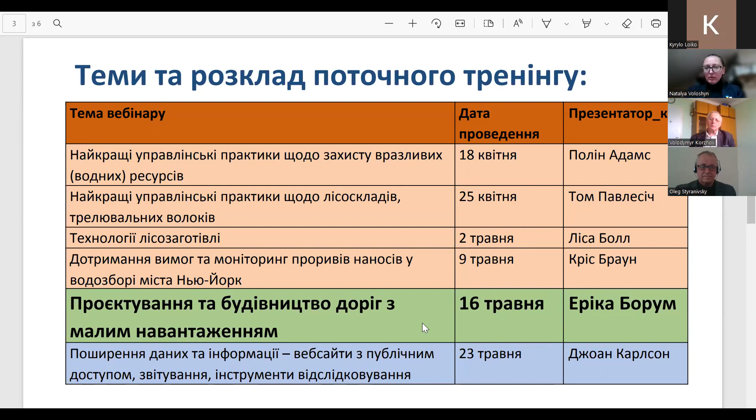The next webinar, as I have already referenced, unfortunately will not take place, or rather it will be postponed, so it will be incorporated into the next training. I'm very sorry for being a little bit hectic. So you will be able to be exposed to Joan's presentation, but a little bit later.

Here you can see the ground rules of our webinars. They're quite flexible, but still important. So the first part of the webinar is the presentation on the topic, and you are kindly encouraged to ask any questions or articulate any comments in the course of the presentation. Then we will have a lengthy Q&A block. But once again, if you come up with questions in the course of the presentation, and then there are some follow-up questions, we will do it in the midst of the presentation as well.

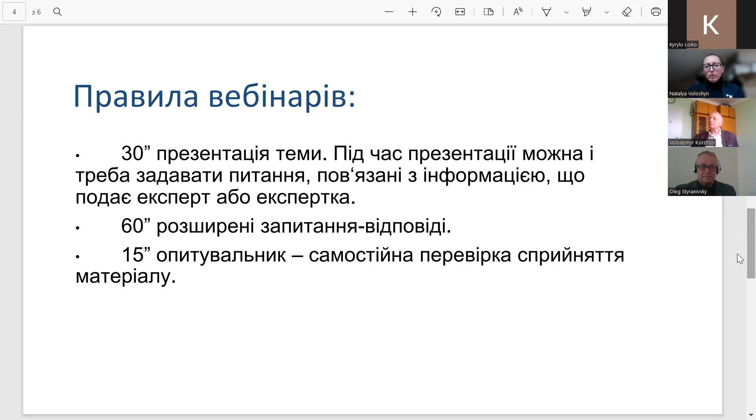And then at the very end of the webinar, if time permits, we will walk you through the quiz. We designed this quiz as part of this training course because we believe that it's a great self-assessment tool for all the participants.

Some other ground rules: we're going to have simultaneous interpretation, and we have our interpreter working with us, Ola. Please pick the relevant channel depending on the language that you want to hear. To this end, find a globe symbol at the bottom of the Zoom screen. It should say interpretation there. Click on it and pick the relevant channel. So if you want to listen to everything in Ukrainian, pick the Ukrainian channel. If you want to listen to everything in English, pick the English channel, or you can have the interpretation off if you want to listen to everything in the original language.

If possible, and if connectivity allows, please have your camera on, because that will definitely facilitate our communication during the webinar. And I also have a big request to all of you to have your cameras on at least for a couple of minutes for this intro, because we would like to make a screenshot. This is our final webinar within this series, so we want to capture everything for the future. If you want to say something, you unmute yourself. Whenever you're not speaking, please have your mics off because we don't want to have any background noise.

If you want to ask a question, you can raise your hand virtually. There are multiple reactions on Zoom, so you can utilize them. You can raise your hand, you can clap your hands, you can have some fireworks or do whatever with these reactions. And settle down snugly. You can fetch your favorite drink. We want to make sure that you are cozy and comfortable because we have 2 hours of work ahead of us. So we want to make sure that you feel comfortable.

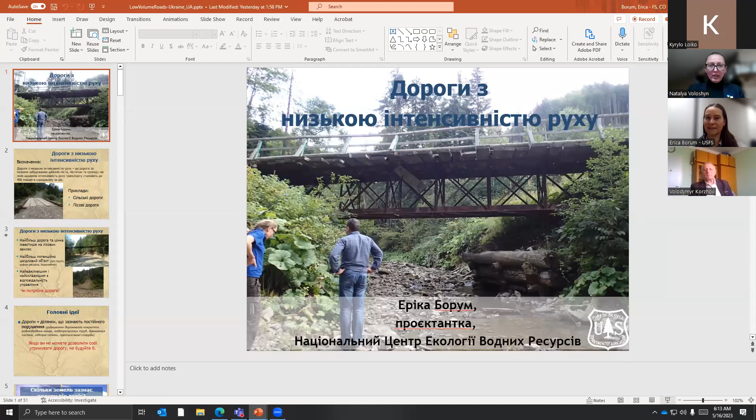Hello, everyone. Do you see this? Not yet. Okay. I can see your presentation. Okay. I will guess. Can you see it?

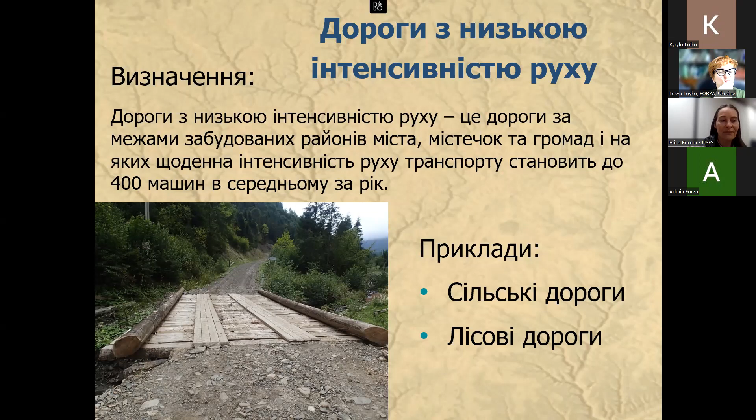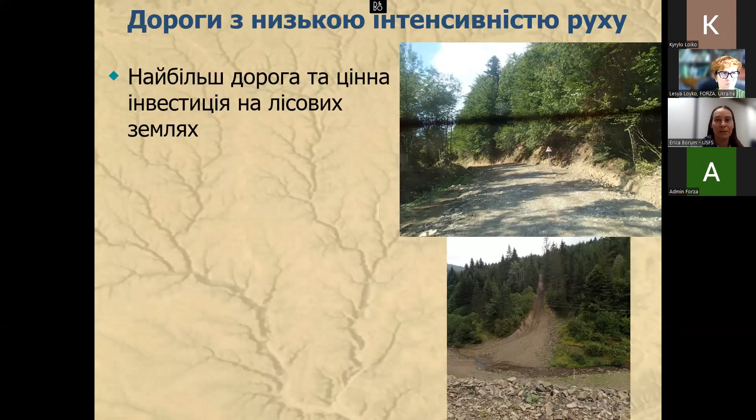So from my perspective as a road manager for the Forest Service, our road system is several things to me. It's our most expensive and valuable investment on our forest lands. If you have been involved with road construction, you know that they are expensive to build. They are also our most potentially damaging feature on the landscape. So ensuring that best management practices are followed is critical to the longevity of our road and maintenance. So that leads us into roads being our most important and difficult stewardship responsibility. So for any new road construction or road reconstruction, it's important to answer the question, first and foremost, is the road needed?

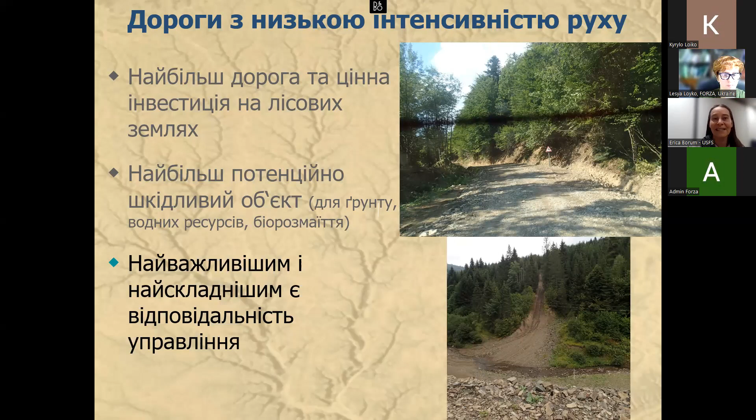So we'll get to our first key idea. We know that roads are chronically disturbed areas. They're compacted earth, void of vegetation. And something I remember hearing a long time ago is roads, they last a very long time on our landscape. We can see wagon trails from hundreds of years ago. They are called scars on the landscape.

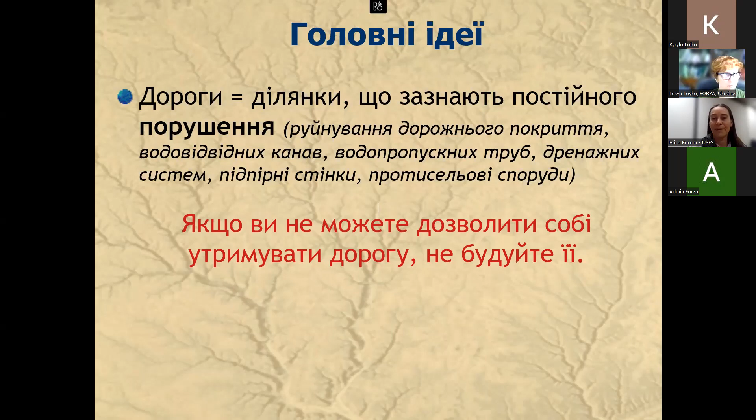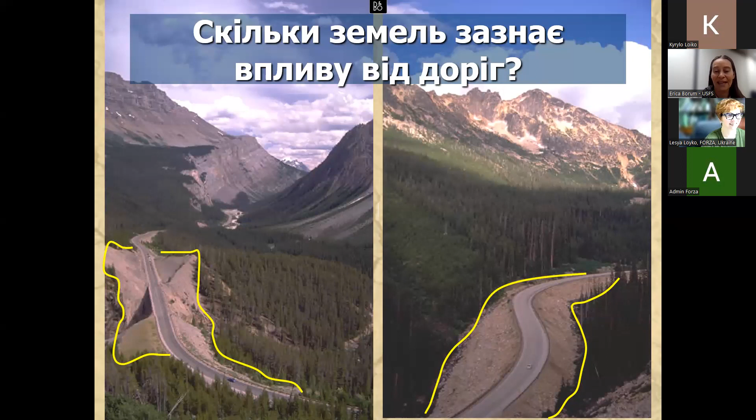Another example of chronically disturbed area includes the surface runoff from roads when it rains. So when you look at the adjacent area of this road, surface runoff is virtually non-existent on the intact vegetated forest soils. It infiltrates. But on compacted roads, it's very obvious. And as a forest roads manager, once we concentrate that flowing water, we own it, meaning it's our responsibility to deal with the flowing water and the sediment that it carries. So roads can be very erosive.

The preferred methodology for roads is to use vegetated soil as nature's treatment system. So looking at this diagram, left is a compacted road where we can't get into the soil, that causes the water to pond. The idea is to move that water off of the road to a vegetated area where it can infiltrate. So managing water runoff, ideally by infiltration, becomes our task.

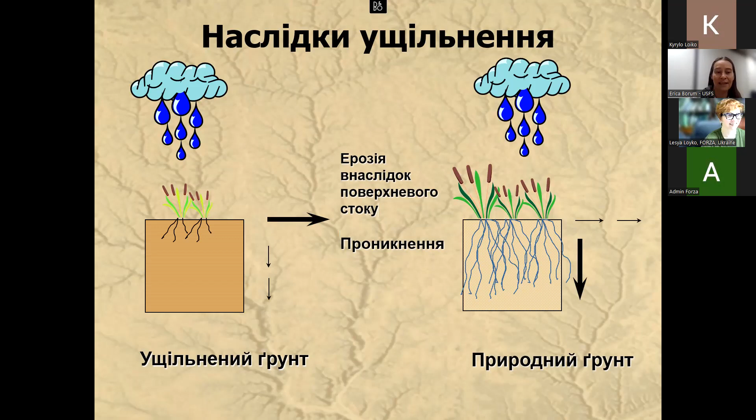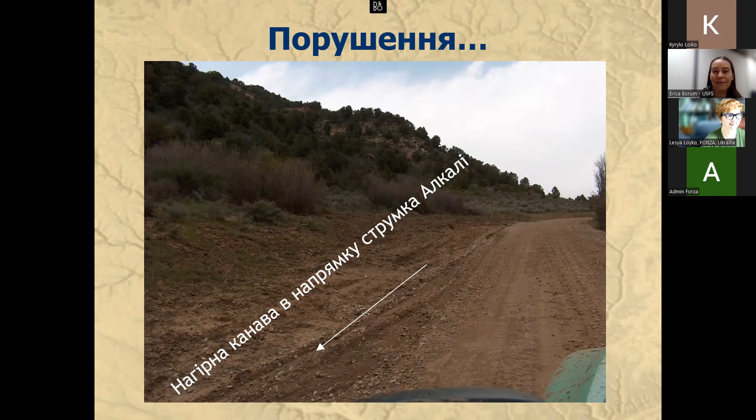So we'll look at a few bad examples of roads. And looking at this picture, we see that the road surface is not the only disturbed area. We have a recently graded or disturbed ditch line that adds to the bare soil. So this ditch is moving directly toward Alkali Creek, connecting our road straight into the stream channel without any infiltration, resulting in a loss of water quality for this system.

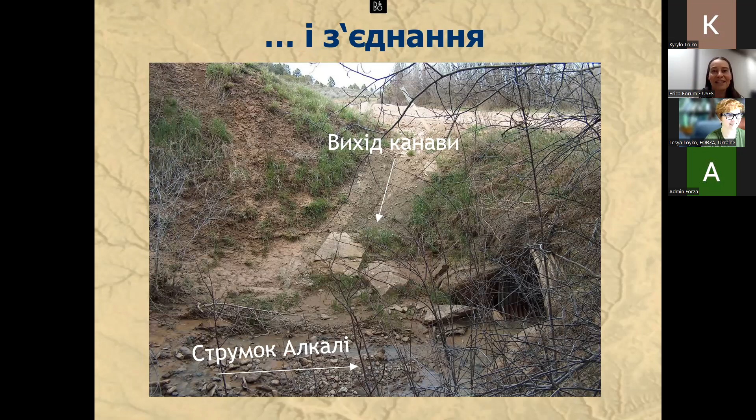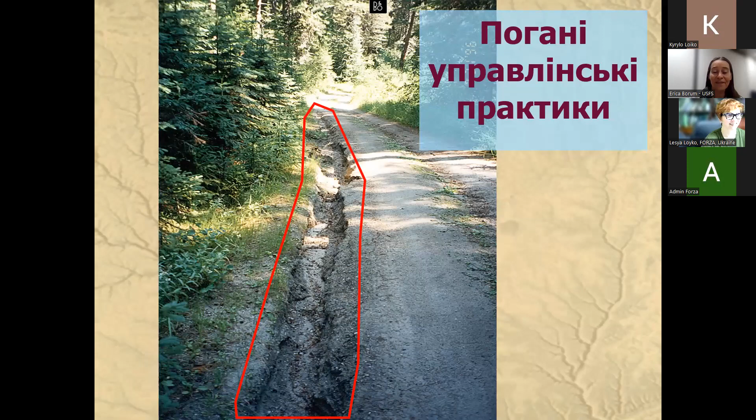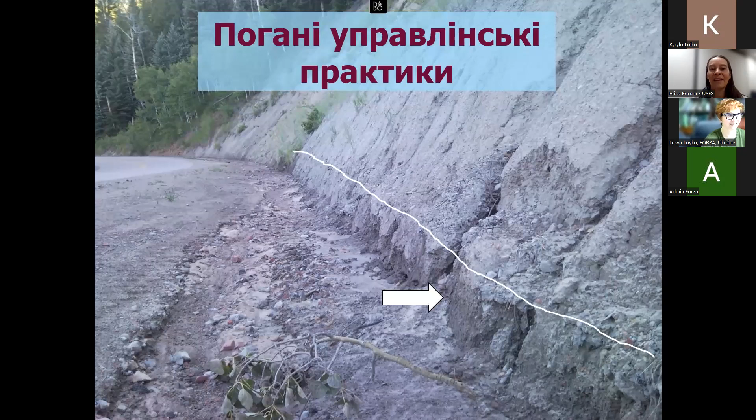And thinking about our roads and the disturbed area, some areas are really disturbed. And we have this cut bank where no vegetation has grown and it has resulted in a landslide. So these unstable slopes are a great source of erosion. So thinking about the angle of repose, or how steep the soils can remain stable on a cut bank, is important.

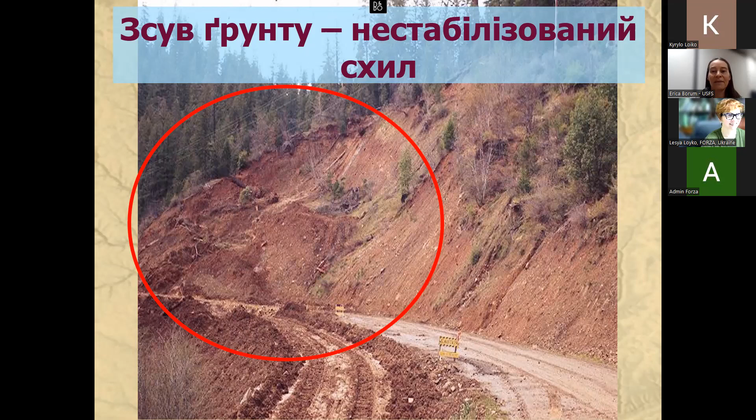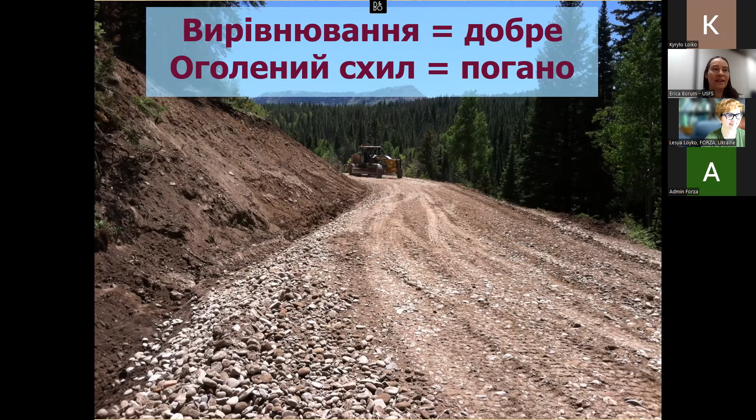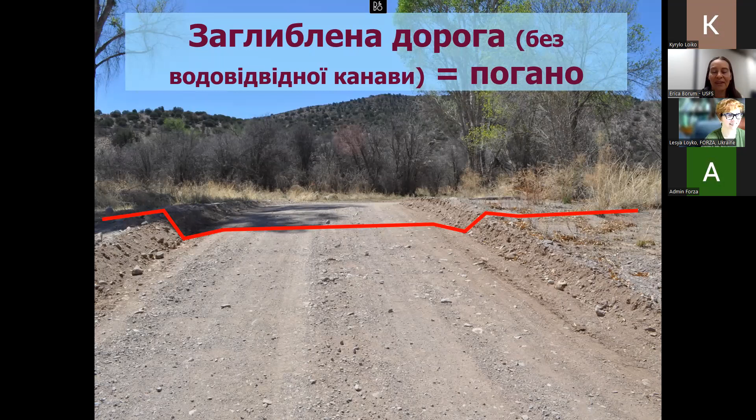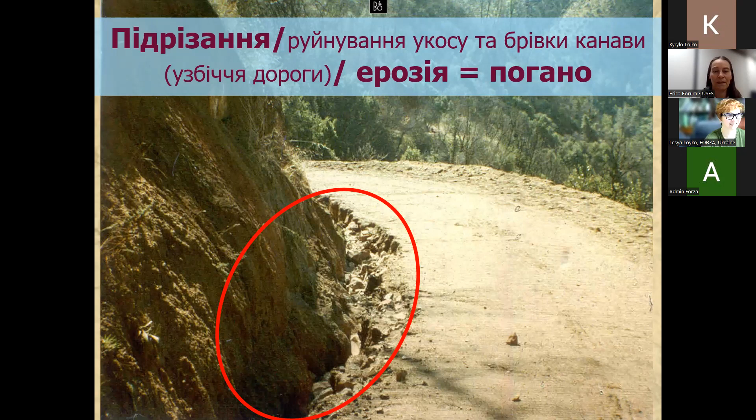And another bad example of too much water undercutting the adjacent cut slope. So one thing to think about if you are responsible for road maintenance is if a ditch is vegetated and it is functioning, there is no need to disturb it. And because road surfaces concentrate water, our goal is to disconnect our roads from our streams, including our skid trails from our streams. And here's a picture where they're directly connected.

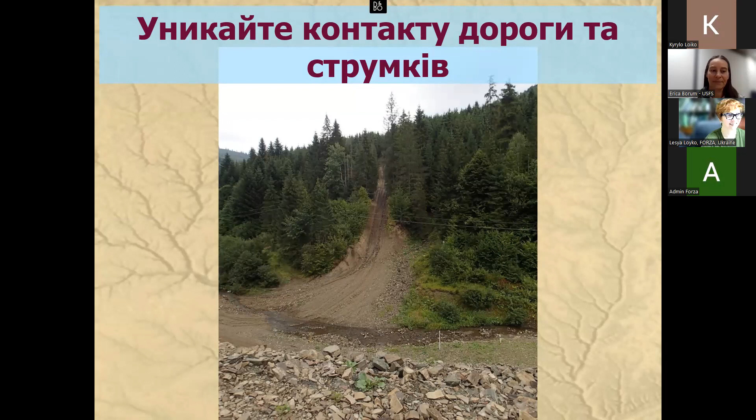So just as our streams do not benefit from road-related sediment, sedimentation from our roads is one of our greatest water quality issues for nearby streams. We also know that our roads do not benefit from water. But why does this matter?

This matters because we don't live in a bubble and we are dependent on biodiversity and the animals in our ecosystem. And most animals depend on water or streams or rivers for survival. So for example, I live in the state of Colorado in the USA, and the area of land that makes up wetlands, streams, or rivers is just 3% of the total land area in Colorado. However, it is estimated that 90 to 95% of the animals in the state rely on these rivers and wetlands for survival. And so these sensitive areas or wet areas can be very damaged by our roads.

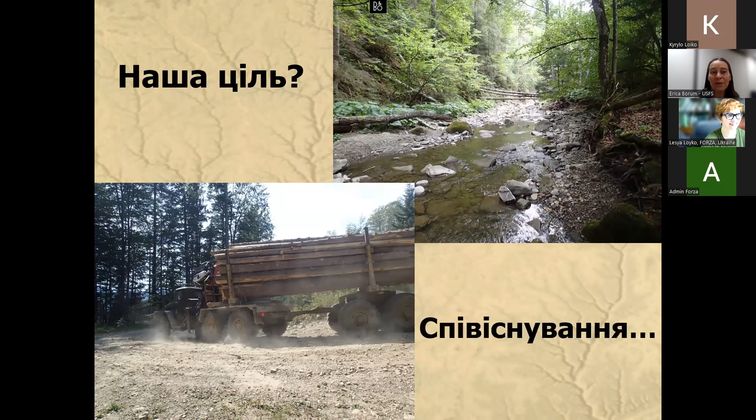So one could argue that all of our waters are sensitive waters for those who depend on them. So if a road is really needed, going back to our first point, our goal is to coexist, so live together. So getting to our next key idea, we've known for a long time that our water and our roads are not friends. Climate change is making this fact more and more evident, and climate change is also showing us that Mother Nature is the true boss. So John James Audubon of the Audubon Society has a saying: when the bird and the book disagree, always believe the bird.

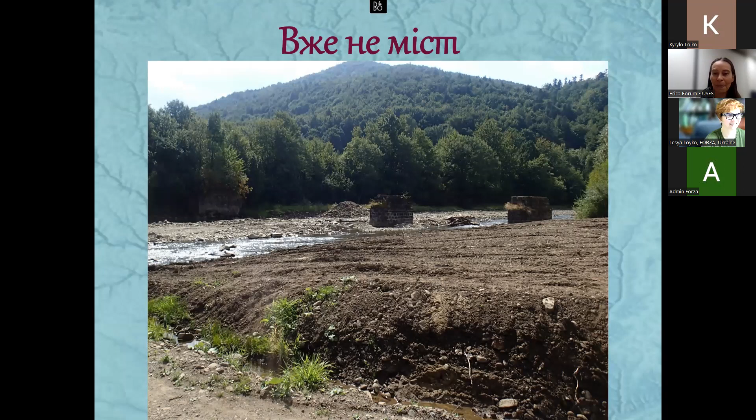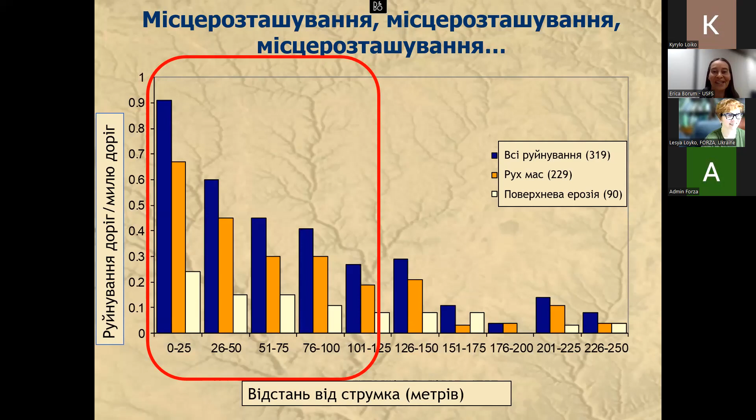When it comes to road failure and erosion, the Forest Service has found that we can prioritize our efforts by prioritizing where most of our road failures occur. And the likelihood of a road failure increases with proximity to a stream or a river. So this graph shows that if you are within 125 meters of a stream or a river, this is where your roads are most prone to failure. So again, Mother Nature will always win.

We historically built roads where roads were easy to build. So up a valley bottom, for example, because the valley bottom is gradual. But we're finding that this method is very expensive in the long term. So the engineering version of John James Audubon's quote, I have adapted to something like: when the engineer and the river disagree, always believe the river. So let the river decide the engineering and the road location. In other words, stay out of the way.

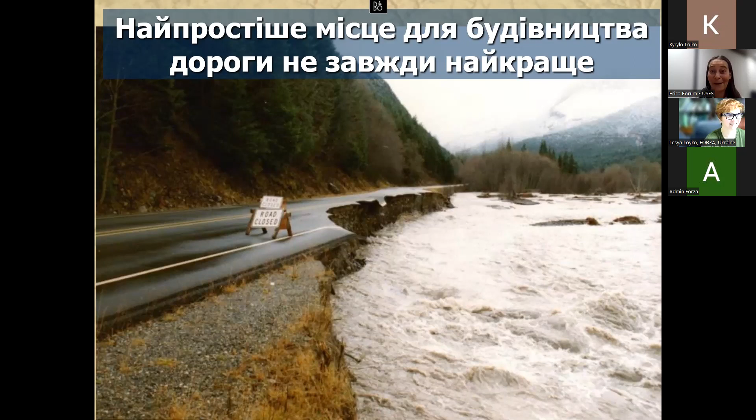So we'll get into some more failure examples. This is the inevitable consequence when a big storm, or a big storm with a high debris load, arrives at a crossing that is too small. In this instance, the road is washed away. And at this particular site, there were actually vehicles on the far side of the failure that were trapped there for several days.

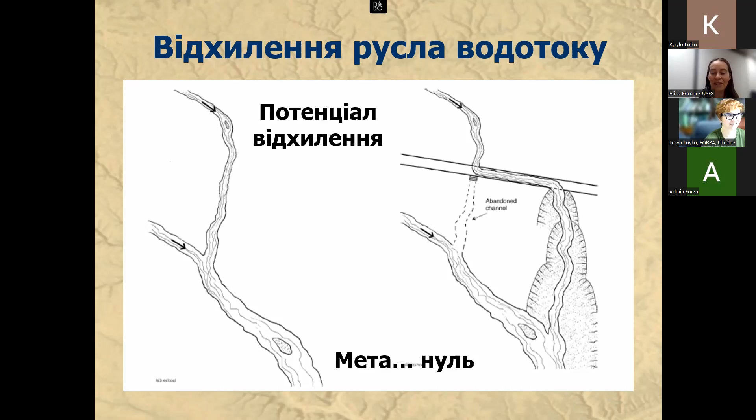So where a road and a stream cross, which becomes inevitable, we want to minimize the stream diversion potential. Stream diversion is especially damaging. This diversion potential is the probability of a stream moving out of the channel and down the road in the event of a culvert plugging or high flood. So our goal is zero diversion potential.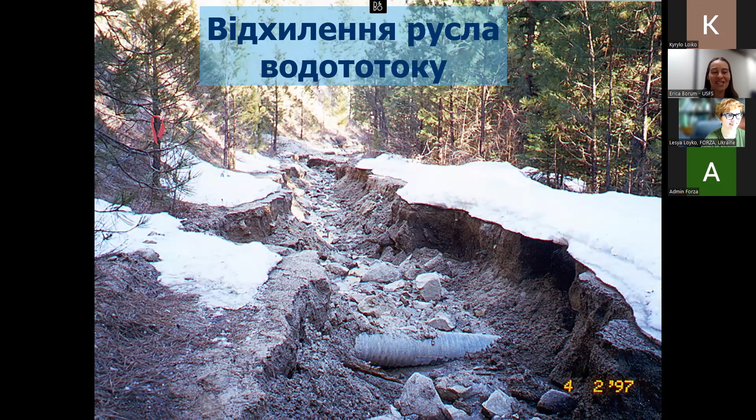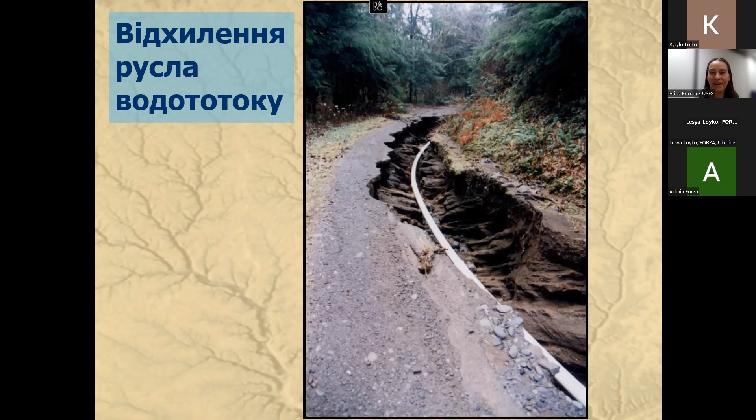Conversely, this is what can happen when a stream diverts down a road due to a plugged culvert. In this instance, a culvert plugged at a crossing, and the water diverted down an inboard ditch on a steep road grade. So all of this erosion area was once the road surface. And you can see at the bottom of this photo a drainage culvert that is likely no longer functioning. This is the same situation as previously, where a stream has diverted and cut down to a utility. So a good reminder that roads and water are not friends.

Eventually, water will find its way off of the road after it's done some damage. And this is where really huge erosion can occur. So where the flowing water finds an exit point, it creates a new channel down a hill slope, sometimes resulting in a landslide, but always resulting in a lot of erosion.

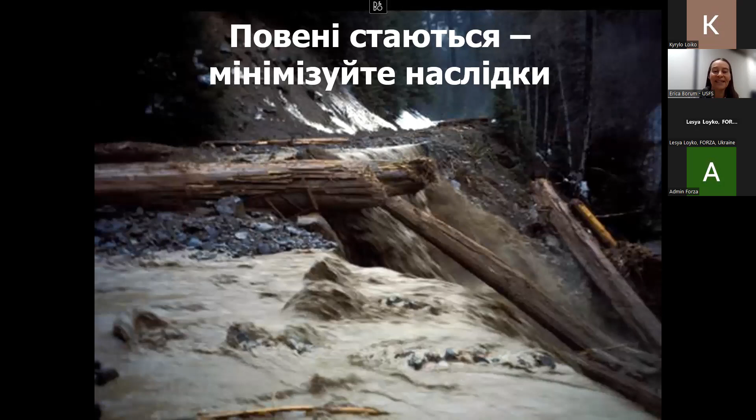So all of our road stream crossings can fail. Some are more likely than others. One way to minimize that risk is to design with failure in mind. So we looked at a lot of bad examples, and it is inevitable that roads and streams will eventually cross. So we want to stay out of the way of our streams, but we'll get into looking at what that looks like at a road stream crossing.

So what do we do? Getting us to our third key idea, roads and streams will eventually cross. So what do we do? Well, the Forest Service has its own methodology that it created to address this crossing. And I'll go into more detail on that. But at the very, very least, accommodate the stream width through the crossing. The idea is to maintain the stream energy.

So we know we've seen examples of streams and rivers moving more than water. So where a road and a stream cross, we want to design for passage, but passage of what? We want to design for passage of water at a flood stage, debris, the animals in that system, both the aquatic organisms and the land animals or terrestrial animals, and then sediment is always moving through these systems. So we want to allow for passage of the sediment. So the whole premise behind this is to maintain the stream's energy, maintain the system's energy.

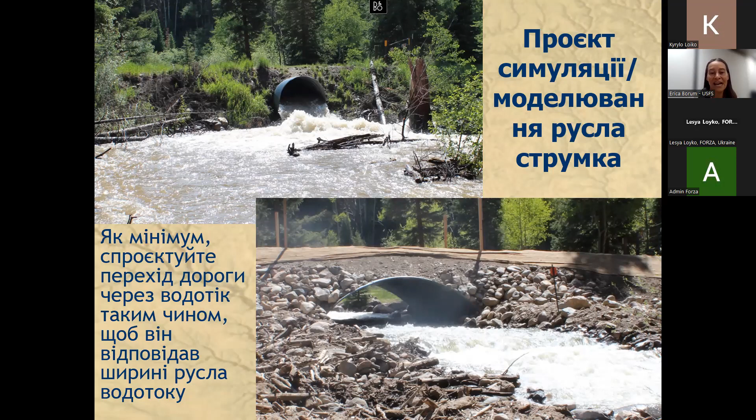And comparing these two pictures, the one on top was an old culvert that was hydraulically designed. So it was designed to pass some amount of flow most years. And then it was replaced by this bottom structure, which spans the width of the stream and allows the natural processes through the crossing.

So the stream simulation design, the Forest Service methodology, maintains habitat connectivity. If you compare the picture on the top with the picture on the bottom, this is at the same site. The picture on the top is before these two culverts were replaced. And you can see how disconnected it is. There is probably a meter drop from the end of that culvert down to the stream. So any animals in the system have become disconnected.

What we are finding is these structures are flood resilient. We have several instances where very large storms have come through at crossings where we have replaced structures with this stream simulation design. And they have been 500-year storms, 1,000-year storms, and they are not failing. They stay intact, they function, and also they are long lasting. We are seeing these structures with a design life of 75 years or more. So they have a very long lifespan.

And when you compare these two pictures, you can notice that the bottom picture has a natural stream bed. So that allows for sediment to move through the system without causing the structure to erode at the bottom, or the abrasion from the sediment moving through the system. As on the upper picture, you can see that culvert has even started to unravel from all the sediment moving through.

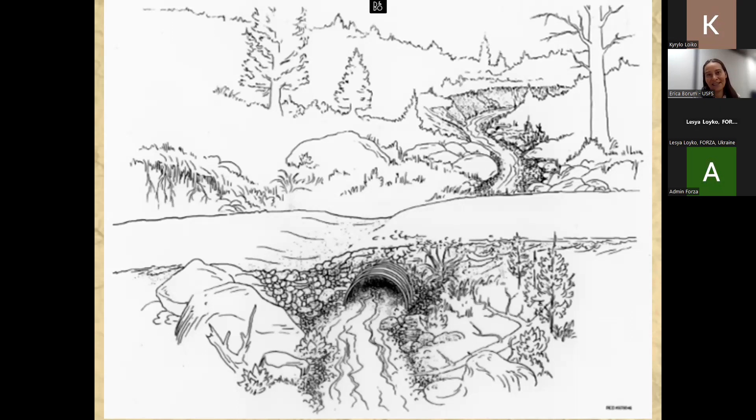So this is just a simple cartoon illustrating designing for failure at a road stream crossing to prevent the diversion potential and to minimize risk. So we talked about how all road stream crossings can fail. So minimizing the risk is another important aspect.

So during some flooding in 1995 and 1996, the Forest Service identified 258 culvert failures that failed due to debris and sediment essentially blocking the culvert. So of those 258 culverts that failed, 91% of those failures were from plugging.

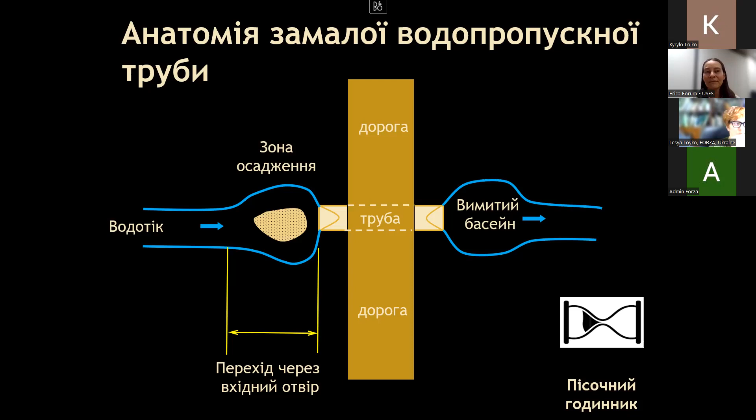So this is just a depiction of how a stream will tell you if a culvert is undersized, particularly relative to width. And we can notice that in this example, the system is shaped like an hourglass. Starting with the inlet, we have this inlet transition zone where water comes down, and when the culvert is undersized, the road is essentially acting as a dam where the water slows down, and then you get a deposition zone at the inlet. And then you have water ponding behind the road, and that causes a bunch of pressure, forcing the water through a little pipe out through the outlet into this outlet transition zone.

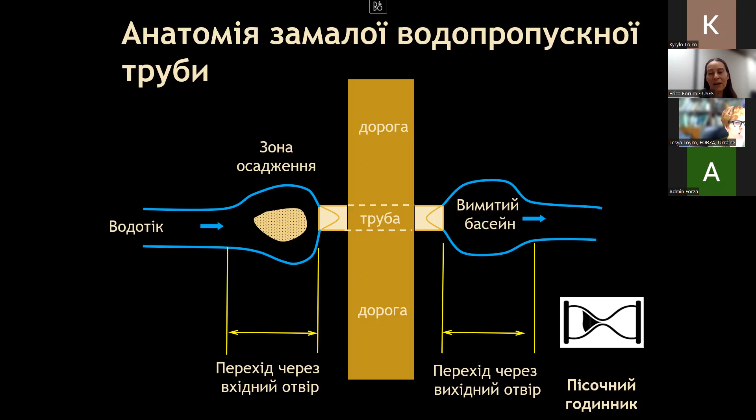So the culvert starts to act like a fire hose, where you get a lot of scour at the outlet, and that starts to disconnect the upstream from the downstream. So looking at the anatomy of an undersized culvert, this is very typical, where you get over widening at the inlet due to water slowing and eddies forming, and then over widening at the outlet due to scour.

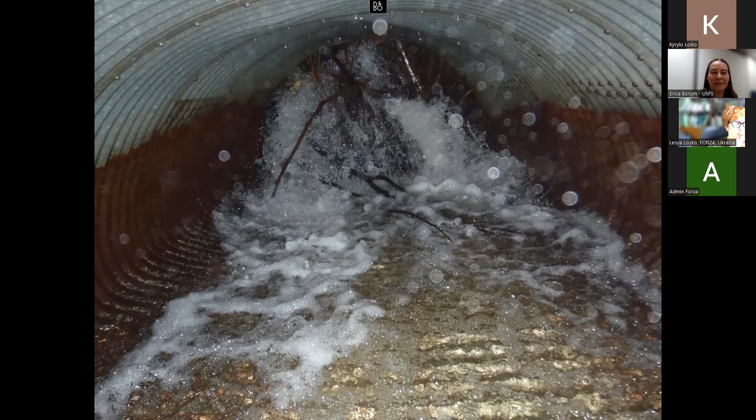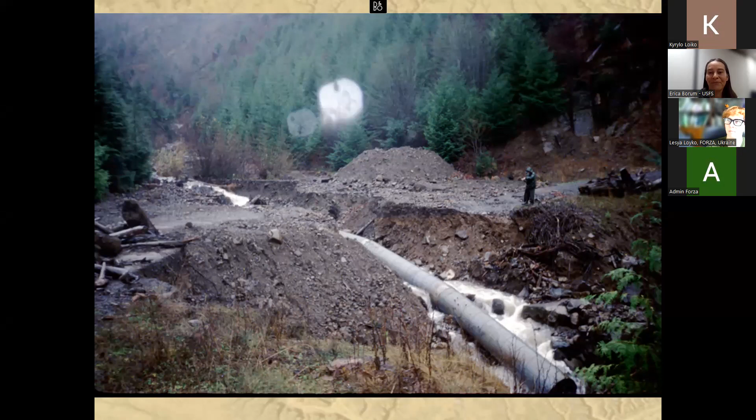So here is a real life photo, not a cartoon drawing, of what a failure might look like at a road stream crossing. So this may be hard to believe, but this is the preferred failure scenario where the diversion potential was avoided. So only this crossing needed to be replaced. But I would highlight this photo, going back to our third key idea, look at the size of this culvert compared to how wide of an area this eroded out. So I would say the main cause of this failure is because that culvert was so very undersized. So maintaining or accommodating the stream width is, at the very least, the importance of these road stream crossings.

So the next key idea. So we started with the question, is the road needed? And then the next question, is there money and a plan to maintain the road if you build it? So if the answer to both of these questions is yes, then using best management practices for new construction is ideal. So we want to integrate resiliency and engineering informed by Mother Nature. We talked about Mother Nature as boss. This will make a road less prone to failure, and it ends up being cheaper and easier to maintain.

So I believe if you joined Pauline Adams' presentation, she discussed best management practices for sensitive resources. So low volume roads have their own chapter within this best management practice technical guide, and it's the road management activities chapter that's of interest. And to highlight some of those, for new road construction best management practices, the first thing we want to think about is locating a road to fit the terrain, following these natural contours, and limit the need for excavation or the disturbed area, the cut and fill.

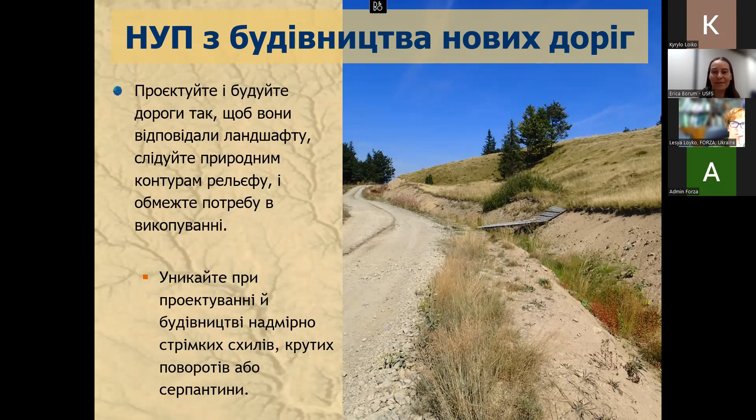So we want to avoid extended steep grades, sharp curves, and switchbacks, ideally. That can be a little difficult in forest terrain where the forested area tends to be steep. So we also want to locate our roads on stable geology with well-drained soils and rock formations. So avoiding, as we already mentioned, the wetlands, the inner gorges, the overly steep slopes, unstable landforms to the extent possible. So although building a road up a valley bottom that has a river in it is the easiest location, it's going to be worth the effort and the money to build a road up out of the valley, up higher, where it will not be impacted by flood events.

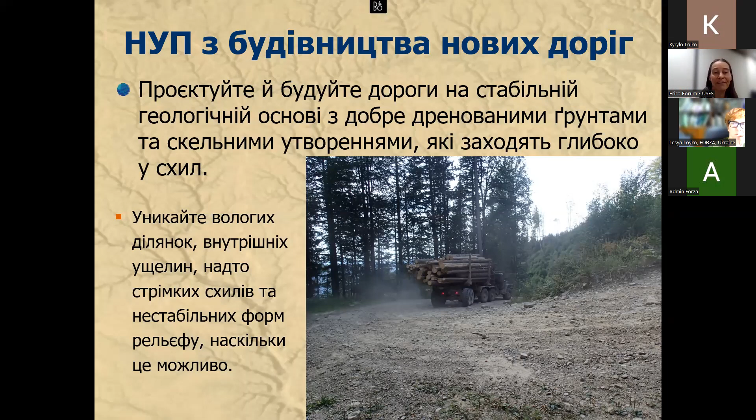And on that topic, move our roads or locate our new roads as far away from water as possible. Water and roads are not friends. And we also want to minimize our number of crossings and disconnect our roads from our waters. So avoiding sensitive areas, riparian areas, wetlands, meadows, bogs, fens to the extent possible, and provide suitable distance between the roads and the water to maintain our desired conditions, our goals, and our objectives for our structures to function and for the stream's natural processes.

And I just wanted to point out this picture. We have Natalia in this photo, and the red circle is showing a former bridge abutment. And you can see that that abutment is very close to the water. I suspected that the stream caused damage to the original bridge, and thus a new bridge was put on top, which is a much better location.

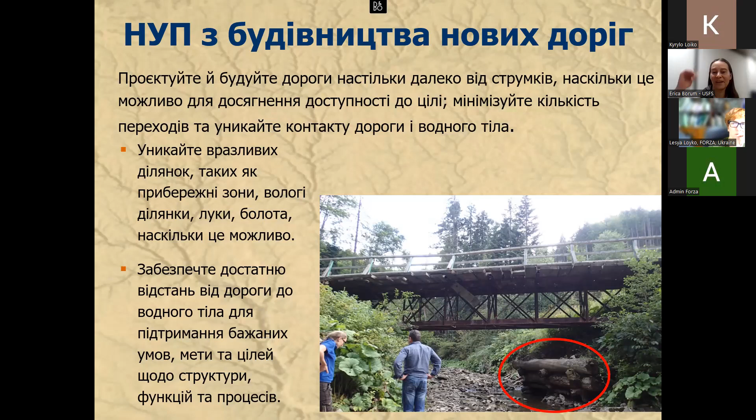So now that I've touched on key ideas of low volume roads, I was primarily addressing the risk and failures. I want to point out several references that may be helpful to you in the future. And these two documents are on FORZA's website. And I believe you will get a copy of the presentations, and each of these are hot linked. So you can actually just click on the picture of the document and it will take you to that document. So the basics of transportation and construction of roads and best practices in the construction.

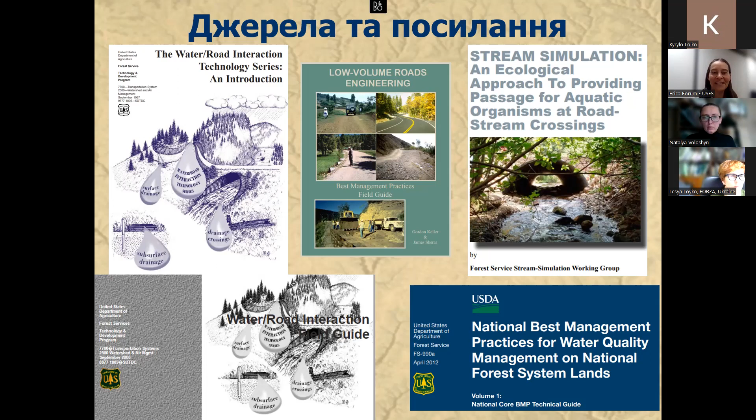But what we also have, the Forest Service has manuals and handbooks on transportation policy, and they're very comprehensive. They cover planning, pre-construction, structures, construction, maintenance, and operation. And again, these are all hot links to these handbooks. So for more information on those, you have access to that. And that goes into Forest Service policy of how we manage our road system.

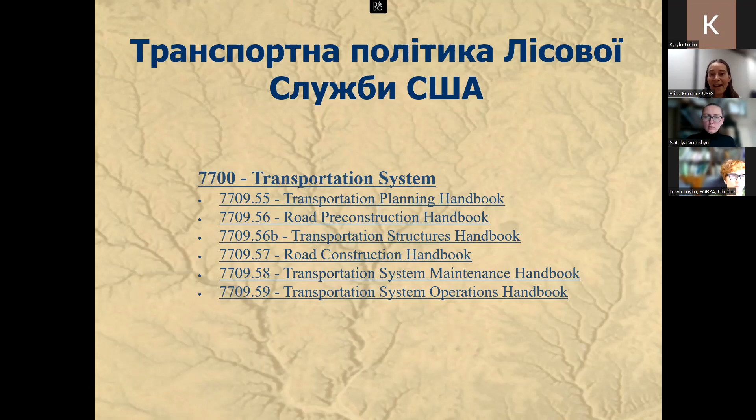And with that, I want to break out into a discussion. Any questions that we may have? I want to know about your roads in Ukraine. How is it going? All sorts of things I want to learn from you. So thank you so much for your time and attention for joining us today.

Thank you, Erica. Thank you very much for this insightful and stimulating presentation. At the very beginning, I wanted to point out that it's 7 o'clock in the morning for Erica, but I forgot to mention it. Basically, she started her presentation at 6 o'clock in the morning. So we are profusely grateful to you, Erica, for your willingness to be up that early and spend this time together with us.

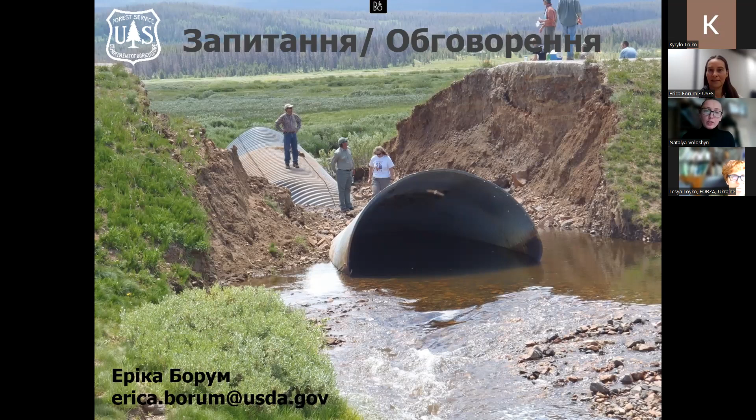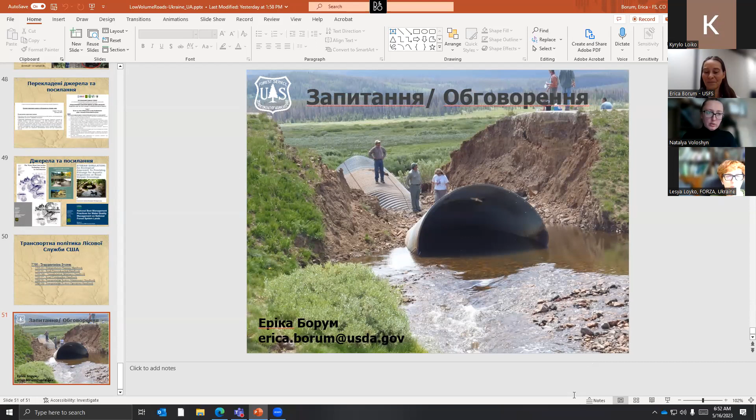We already have some questions in the chat. The first one is from Boris Boychuk. One of the questions is for the Ukrainian colleagues, so think who can answer it, but there are also some questions for Erica. What is the cost of culverts in the US, like the last examples that you demonstrated within your presentation? I guess these good examples. Boris, are you interested in these ones, the good ones? Correct me if I misunderstood your question. So what is the cost of these structures? And there's another question, more about regulations, but let's start with the first one.

Okay. Yes, thank you for that question. This is always the question. How much do these cost? They are more expensive than the hydraulic design culverts in the short term, but we are learning that in the long term, because they're not prone to failure, they become much cheaper. So this structure on the bottom, if I remember correctly, we replaced in 2014. So the numbers are 2014 dollar amounts.

And I believe this structure was 150,000 US dollars. And one thing I wanted to point out is this structure is actually sitting on top of concrete footings. So there are footings that are buried beneath the stream. And then this aluminum structural plate is the lid with the road going over it. It depends on the size of the system. Of course, the bigger the stream, the more expensive. So it's essentially acting as a bridge, but it's a different methodology than a bridge. Thank you for that question.

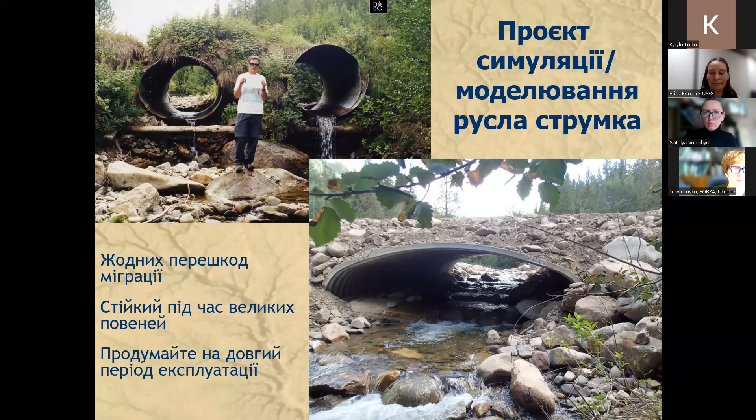Дякую, Еріко, за відповідь. Я повернусь. Thank you, Erica. But I want to revert to the question for the Ukrainian colleagues. Maybe someone has an answer. So the question from Boris was whether someone in Ukraine is manufacturing such structures across streams. So maybe no one is ready to answer this question right now.

Volodymyr, I can see a big surprise on your face. It looks like you haven't really spotted the question. We cannot hear you. Please unmute yourself.

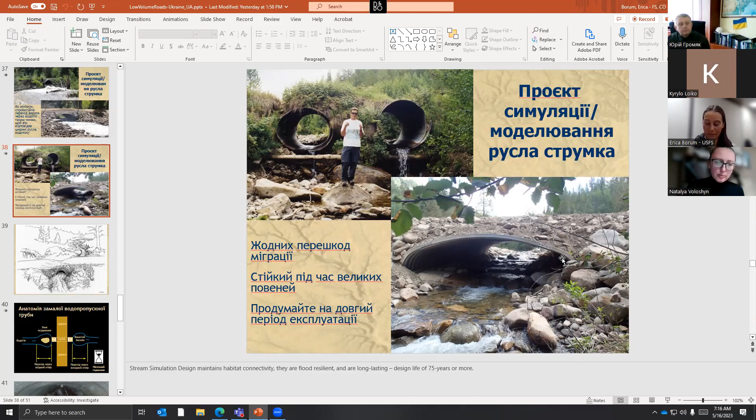"20% of the normal stream size," I think it has to do with the 20% that you mentioned, something about 20% above the stream, or something like that. So he's asking whether it's 20% of the normal stream size or 20% of the max spring flood scale or something like that.

So the 20% I referred to would be the amount of air in the freeboard. So the space between a high flood and the top of the structure is the 20% I was referring to. So we size our structure to meet the width of the stream, and then that 20% is a double check to make sure we have enough room, 20%, to pass floating debris at our design flood.